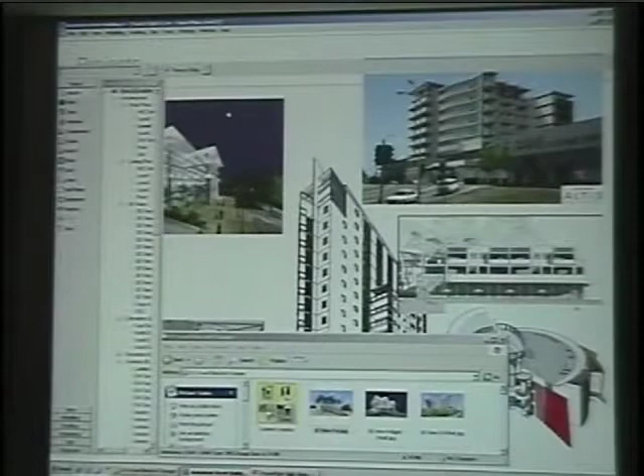If we jump to here, eventually, this is that yacht club. It's on an island called Hamilton Island, on the Great Barrier Reef in northeastern Australia, off the coast of Queensland. The building itself is based on a particular flower, the Hanalawa, which is indigenous to the islands and not found anywhere off the island, which is interesting because the island's only about 15 miles off the coast, and yet somehow these things have never translated onto the mainland.

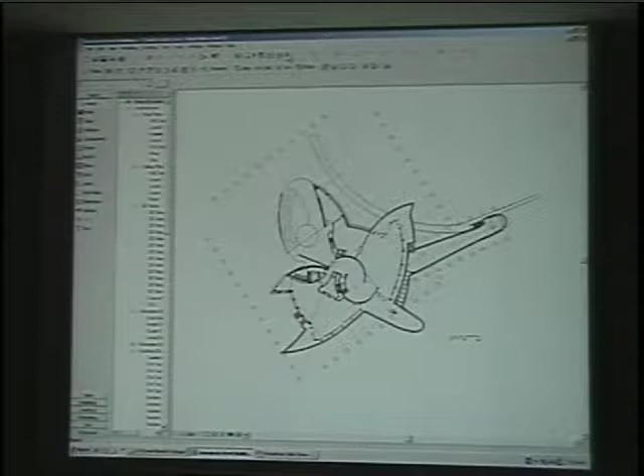So just to have a very quick look, because I don't want to take too much time into this, this was a project I had particular fun with, so I thought I would show it.

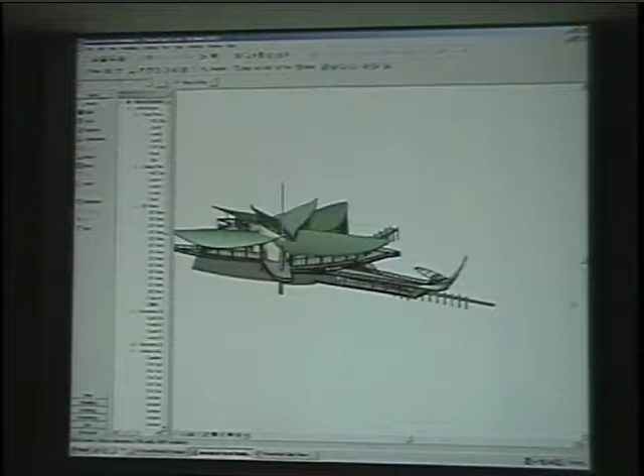As I said, it's a yacht club. I'll show you some images from it as well, but this section of the building is actually sitting on a little spit of land that extends out this way, and the bay is on this side, but this side here is exposed to the Pacific swell, so in moderately stormy weather you'll get waves that are, still trying to convert everything to imperial, right inside the lagoon, you'll still get 12, 15-foot waves.

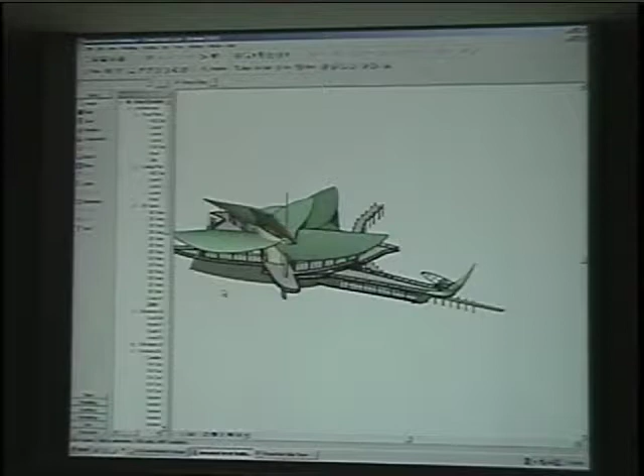So the base of this wall, as you can see in the model at the moment, is only about 3 feet above sea level. So it gets hit quite a lot, and so it's got to be quite a strong object.

But the interesting thing about something like this is it looks like quite a complex object, the roofs in particular look quite complex. And in fact, if you pull up one of these things and have a quick look at it, it's actually very, very simple.

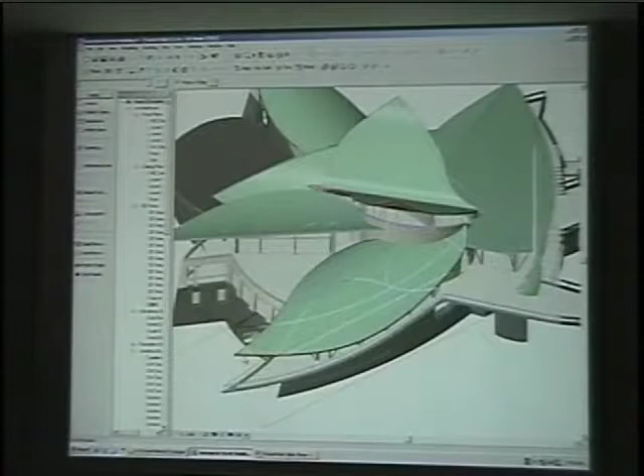What it is, the green form, is just a roof by extrusion, this shape here, running back to the building. It's then broken from the work plane on which it was created and tilted, and then simply a void shape is used, like a donut, removing the outside, to leave us with this sort of leaf form roof.

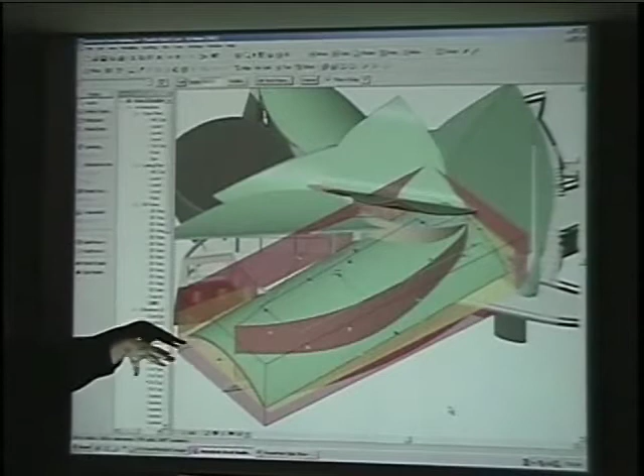So in fact, it's actually very simple structurally, and that's one of the main things we try to do with a lot of these buildings, like that childcare center where all of the walls are curved and canted. A lot of them have holes cut in them and all sorts of weird things. The building itself is actually just sitting on a rectilinear concrete portal frame, and all of those fancy bits are really just cladding, so relatively easy to build.

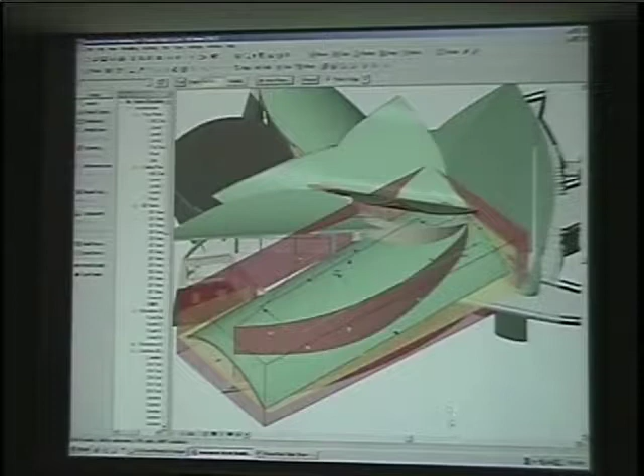Same sort of thing here. The interesting thing about that is it does lead into the other portion of the discussion I wanted to have, which is about process change, because we're having huge fights at the moment with the engineers trying to say, look, it's not that hard, this is not something you can't do. And they're coming along and saying, well, it's impossible to build that.

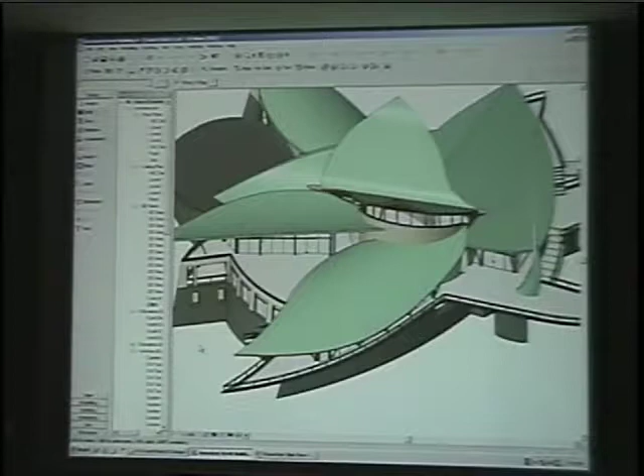So we took them over to another site and said, well, there it is. And they grumbled and didn't talk to me for a few days. But this particular engineer, unfortunately, we didn't get the opportunity to actually specify the engineer, and in fact he still works with pencils and doesn't computerize his drawings.

So he's rather behind the times, particularly as where I'm trying to go with practice in general at the moment is to the point where everybody is using a consistent and coordinated model across disciplines. So this one, unfortunately, as much fun as the building's been, is actually, I suspect, going to be a very painful construction process.

The images from that one, if I just jump forward to some of those images, right down the bottom. So this is the site here. You can see the spit of land running across here, and this is the little walkway with a cafe on the end. There's a lagoon and reef area just out here, but the waves get strong enough during storms to actually breach it.

It's one of the problems, in fact, that Australia's got with the Great Barrier Reef at the moment, the amount of damage that's happening to it because of storms and because of pollution, that this sort of thing is actually starting to erode the reef much faster than the traditional growth cycle's been.

This project is the yacht club and a series of bures, not traditional by any means, but houses that run along the access to the site. One of the difficulties we've had is the slope, which averages about 30 degrees, and in parts it's over 45 degrees, so getting roads and even ramps into the front of the yacht club has been very difficult.

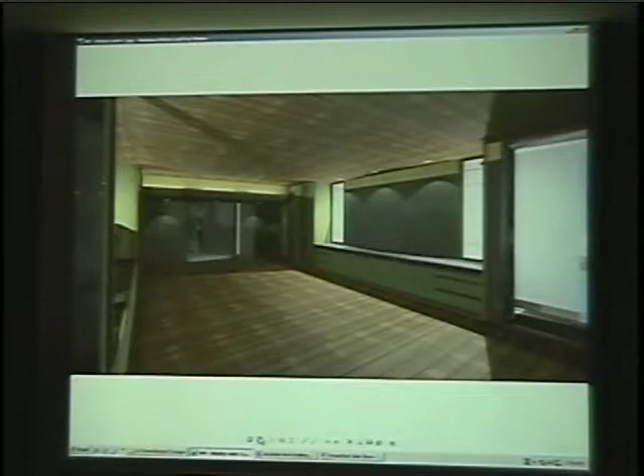That's just a play with some of the roof connections to the outer wall. Don't know why that one's in there. The deck off the dining room on the upper floor, and this is out from the cafe on the little spit of land looking back.

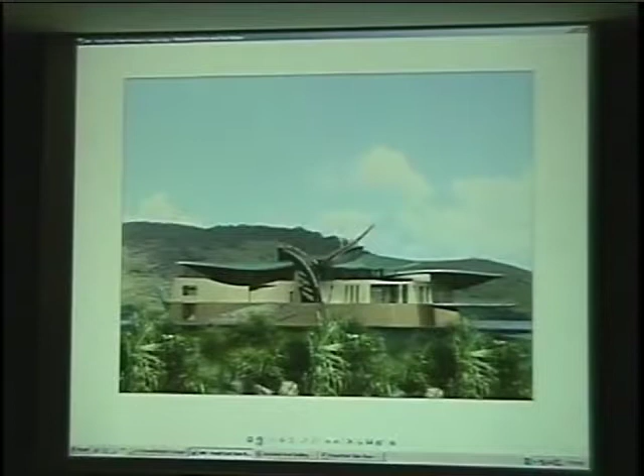You can see in this one we've got the original roof shape, based on when the flower opens and closes every day. This is what it looks like at about 10 or 11 in the morning, and by about 6 at night it's folded back downward. That's what we've ended up with - it's just a much easier form to work with.

One of the interesting things about Hamilton Island is that it's big enough to have golf carts but not big enough for cars. Because of the slopes on the island, you can wear your golf carts out very quickly - the brakes get red hot, which is an interesting thing to see happen.

They had a requirement, which we're still fighting with, to take the one car on the island - a stretch limousine used for weddings - and have a driveway up to the front entry of the building and back down again. Nearly the full width of this spit of land was going to be required to do it. Where we've gotten to is we actually have a turntable at the top to spin the thing around so we can point it back down and out again. But we'll see what happens with that.

So as you can see, you come up this side, and golf carts can make it around here, but this big car couldn't, so we'll turn it around on the turntable. This is the entry lobby area - a yacht club with far too much money.

That's the original roof and the later roof. You can see here with the actual water level - when a big storm comes in, I'm not sure if these windows are going to survive, or they'll need to be very, very thick. Inside there is a 25-meter lap pool, which will be the only one on the island, quite surprising. But the bottom of the pool itself is actually just below sea level.

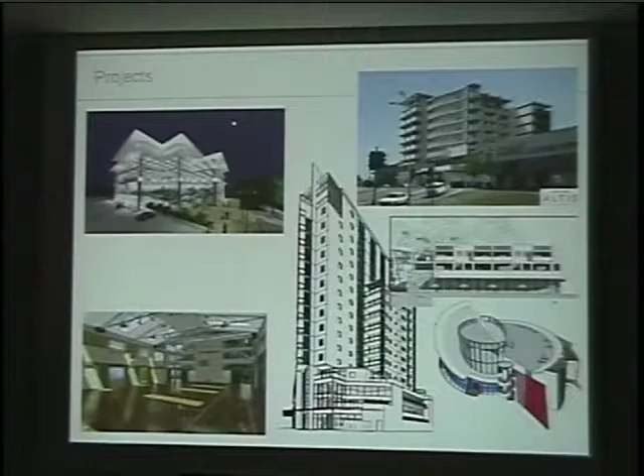If we've got a few extra minutes, I'll come back and pull up a couple other files, because the one thing I wanted to talk about was this: we use Revit end-to-end on our projects in our office, from massing studies through to construction documentation, as-built drawings, all of that sort of thing.

We've gotten involved with a few of the clients we work with through our technology side of the business in facilities management with Revit. For instance, one of them is Woolworths. Now in Australia, Woolworths is a supermarket chain, just foods - the biggest supermarket chain in Australia - and we've converted them across to Revit.

What we now have is a system in place where we can go in and tell you how much electricity is required by the bakery, how much water services are required by meat prep, and whether the shelf space for dog food in Albury-Wodonga is more efficient than that in Melbourne in 1986. So all of that sort of information we can actually pull out of the Revit models.

So we're starting to push where we can use that model, but nevertheless, other than that last step, which is fairly isolated to what we've been doing with Woolworths, it really is a question of doing these things within your practice, gaining all of the advantages Revit will give you in doing your architectural work.

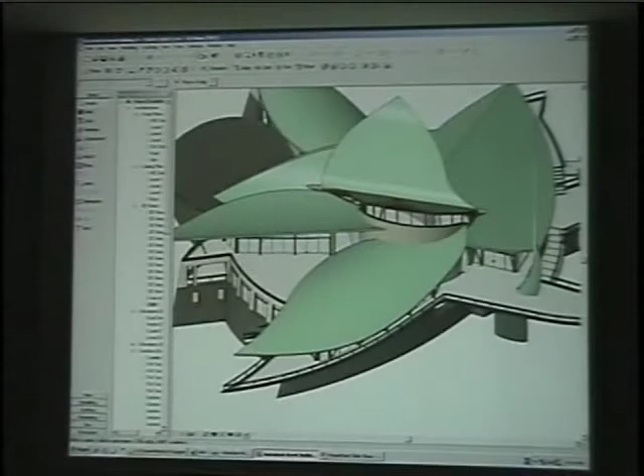In order to experiment with what are the actual methods we can put in place to test this as a hypothesis, and to try and build new systems, build new processes.

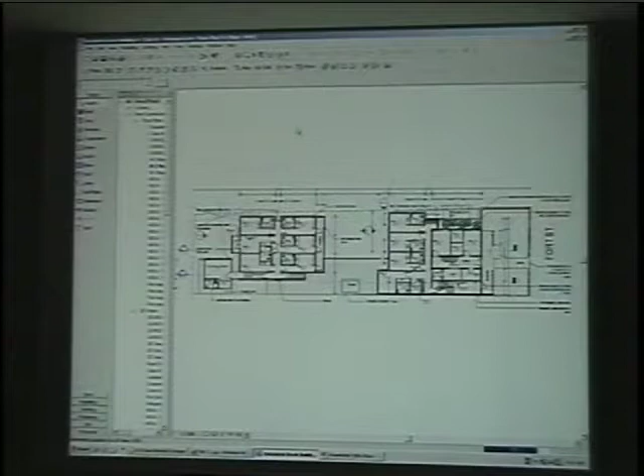We have this little project in Sydney. It's a rather confused one because the client is the government of New Caledonia, the project manager is in Melbourne, which is about 800 kilometers south of Sydney, and of course we're in Sydney and the project's in Sydney. But it's a fairly small project.

It's probably going to cost about $3 million. It's a very simple building, none of the forms like that yacht club project, just rectilinear. It's only at most 3 stories tall. It's got a building that's considered to be of heritage interest, which means it relates to items that are heritage listed in the area but is not listed itself. On the front of it, it's a relatively constrained site. But because it's quite simple, we've kept the structure very simple, it's given us a good little platform to use as an experiment.

Now what's happening with this project? Hopefully in 3 or 4 months, whether at Autodesk University or afterwards, I'll be back in the country, because there's a couple people who want to see some results from this, because that's what I can't offer you right now. What we've done is we've put together a design team, which is, in traditional terms, the consultants.

Every week at the moment, and every 2 weeks into construction documentation, the architect, structural, mechanical, electrical, fire, BCA—which is the local Australian building codes—the builder, and on occasion fabricators all sit down together in a design meeting.

Very impressed with that petal project, I don't think I've seen that. Yeah, that's a new one, it only actually went public a few weeks ago. So that's great.

Revit with images of materiality? The Revit will work - sorry, you just mean in rendering terms, getting something relatively realistic? Two responses to that. The first is Revit can create some very good renderings, and the renderings of the yacht club you saw, other than the fountain in that front image which we faked in, were entirely inside Revit.

But if you're going to create a large series of high-end renderings, you should take the model, develop it all in here, but then take it out into something like Max or one of the other rendering programs, because Revit's renderer is wonderful in its simplicity and its connection with the model. I've built a model, I can turn around and hit render and get something without having done any work at all. With a little bit of work, I get a quite decent result. And as I modify that model, I can get instant updates, depending on the computer, to that model.

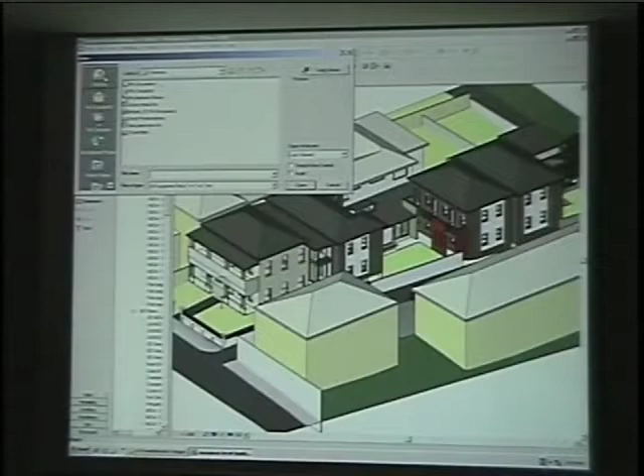So the images that we saw, were they combinations of Max? No. The interior ones - have you got the ones from the Yacht Club? I didn't know Revit images either. Okay, that one is not Revit. These are - that's not - this is Revit, that's Revit.

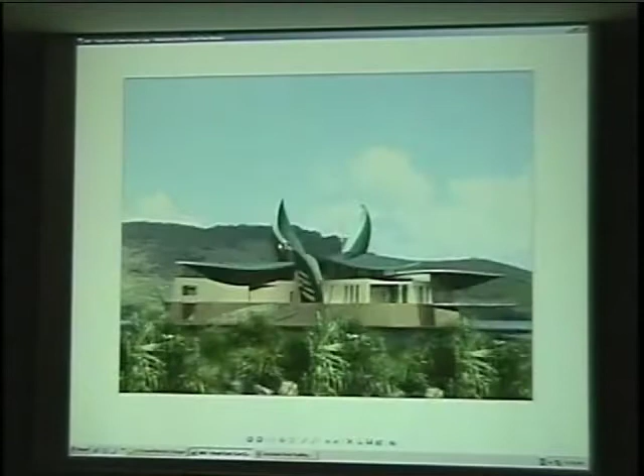With some Photoshop work, yes. The unfortunate part is that you can't deal with the foreground image inside Revit, but these are all Revit images.

There's been some rumors that the next version of Revit may have some integration with the next release of Viz. Do you know anything about that? Yes, and I'm not allowed to tell you that. Unfortunately, it's not in the next release. There's a lot of talk about when it will happen, a lot of assumptions, and I don't know the answer to that.

On the other hand, look at how you use Revit and the simplicity of its interface, then look at Max, where if you open all the little buttons down the side, it's about 12 feet long. How they go about converting that process to Revit's logic and ease of use is going to be a big trick. Once they get around to going to 64-bit systems, which is going to happen at some point, they'll have to do a major rewrite of the program, and that's when it's likely to occur.